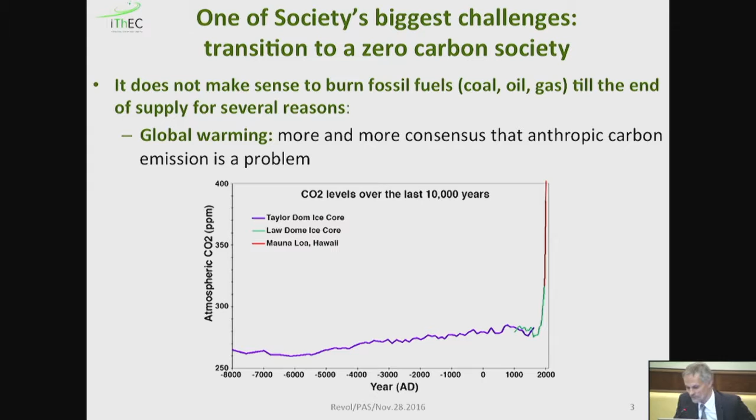I had prepared a few slides of motivation for the work I'm going to present here, but Professor Xu already discussed all this very nicely and very clearly. So let me just state that we have every reason not to burn fossil fuels until the end of supply. One reason is global warming. The other one, which is an immediate, real, and very costly major problem, is air pollution.

In fact, the European Environment Agency stated that air pollution poses the single largest environmental health risk in Europe today. And we're all familiar with those pictures of China with pollution. However, when the wind blows from Germany in Europe, Paris starts looking like Beijing at some times. So this is an issue that is everywhere in the world. It's very costly in money. Europe spends more than 40 billion euros in healthcare expenses related to air pollution.

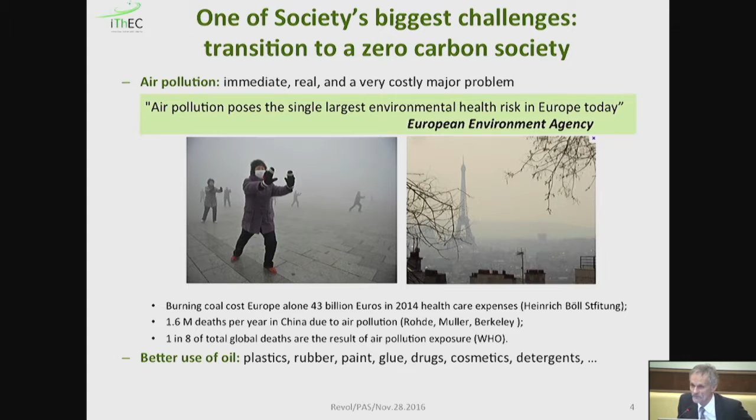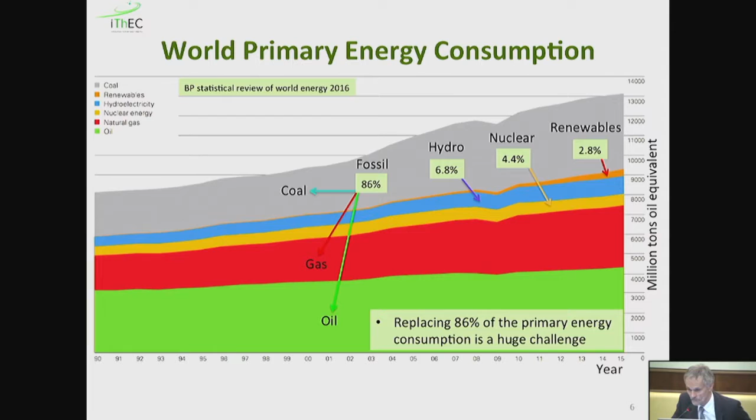Well, if you look at the energy mix in the world primary energy consumption and realize that fossil fuel in 2015 still represented 86% of the whole mix, you can really imagine how huge a challenge it is to replace fossil fuels. It seems that I forgot one slide, sorry. So, however, those fossil fuels are cheap, abundant, so the current tendency is still to increase the consumption. This is data extracted from the latest BP statistical review.

And, okay, let me skip this. So,

the solution must come from R&D, and R&D must be systematic. In particular, it must not exclude the nuclear fission domain. Nuclear fission energy has a lot of qualities. It's abundant, it's energy intensive. I remind you that if you want to sustain 1 gigawatt of electric power for 1 year, you can do that with 1 ton of thorium, for example, but you need 3 million tons of coal.

And nuclear energy can ensure baseload electricity production. It emits no greenhouse gases or air pollution. It could be made sustainable. Remember my definition of sustainability. So if it were not for accidents, waste management, and proliferation issues, clearly nuclear energy would be ideal. So the question we should ask is, can nuclear energy be made acceptable to society?

The present nuclear energy technology, I remind you, was not chosen to be acceptable. The uranium fuel cycle was chosen in order to produce plutonium for nuclear bombs, and the pressurized water reactors were invented to fit on a boat. So the question is, is there a better way of exploiting nuclear energy? And a number of physicists think that one answer to this is thorium fuel in fast neutron accelerator-driven systems, so-called ADS.

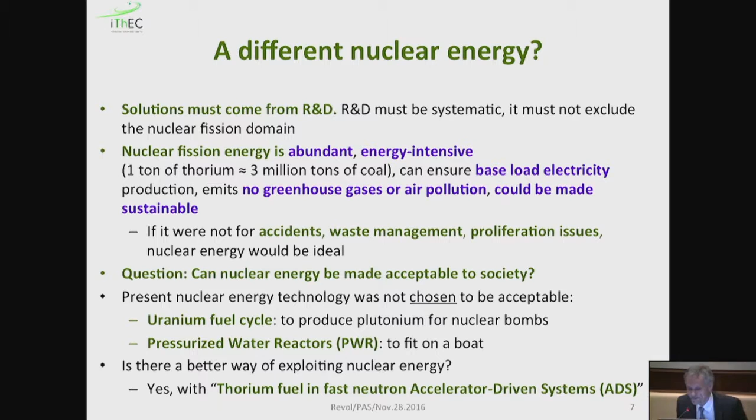Let me make a short comment on nuclear waste. Regardless of national policies, whether countries like Germany want to stop their nuclear programs, or countries like France want to continue their nuclear program, or developing countries want to start a nuclear program, the issue of nuclear waste has to be solved. The added requirement of retrievability of the nuclear waste makes the geological repository strategy at least more complex, if not questionable.

On this graph here, you have the predicted evolution of one component of the nuclear waste, the transuranic component, which is the long-term component, all the way to the year 2050, showing that if you only assume the existing nuclear power plants and those which will be commissioned by 2035, then the inventory of this type of waste will have to double.

Now, if you were to produce the whole energy of the world with nuclear systems like the one we have now, then you would have to increase all these by a factor 20. Now, to give you an idea of scale, 6,000 tons of TRU represent a lot of power. You can drive 6 power stations of 1 gigawatt electric for 1,000 years. So it represents a very large potential.

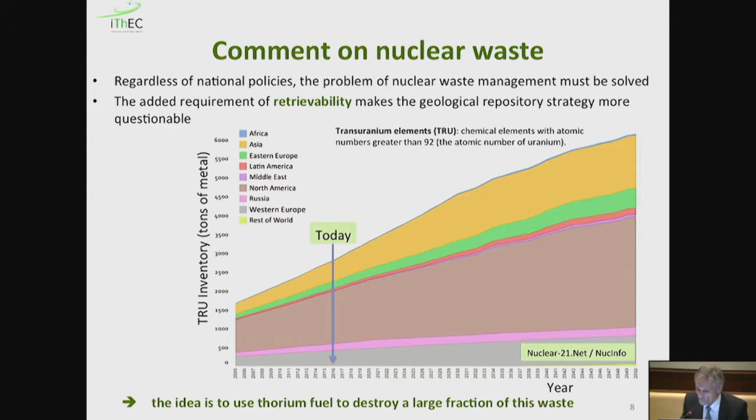And the idea is to use thorium fuel to destroy a large part of this waste. Well, thorium is an interesting element. It has excellent physical properties, better properties than uranium in terms of melting point, thermal conductivity, smaller expansion coefficients, which, if you want to manufacture fuel with it, implies a higher margin for design and operation as nuclear fuel. It's abundant, 3 to 4 times more abundant than uranium, and it's broadly distributed in the world, which has obvious geopolitical advantages. The known and estimated resources are about 6 million tons.

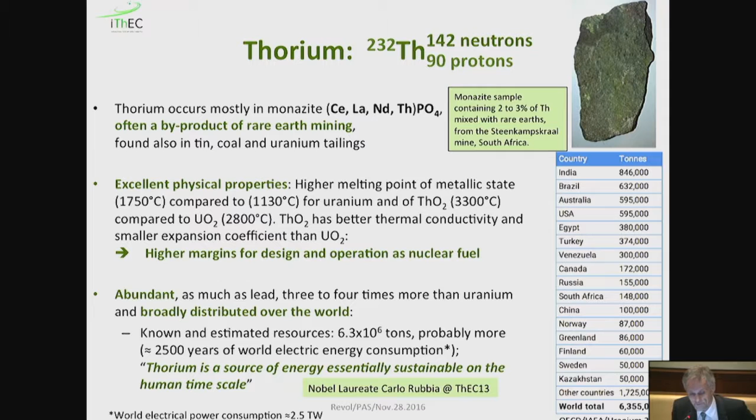Just to give you an idea, we could power the 2.5 terawatt of electric power used by our civilization today for 2,500 years. So this is what led Carlo Rubbia at the ThEC13 conference at CERN to state that thorium is in fact a source of energy essentially sustainable on the human time scale.

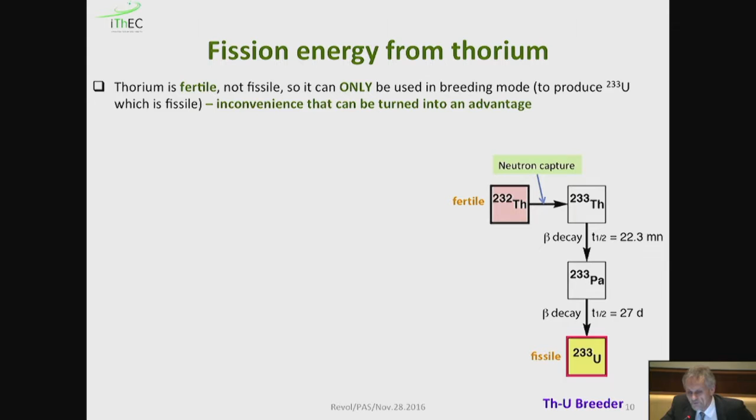Now, how do you use thorium? Unfortunately, thorium does not fission, so you have to transform it into uranium-233. This is what we call a breeding process. You put thorium in a neutron flux, and then you can produce uranium-233, which produces energy. It's a slight inconvenience, but as you will see later, it can be turned into an advantage. This breeding process is very similar to what is being prepared in generation 4 of power stations, breeding plutonium-239 out of

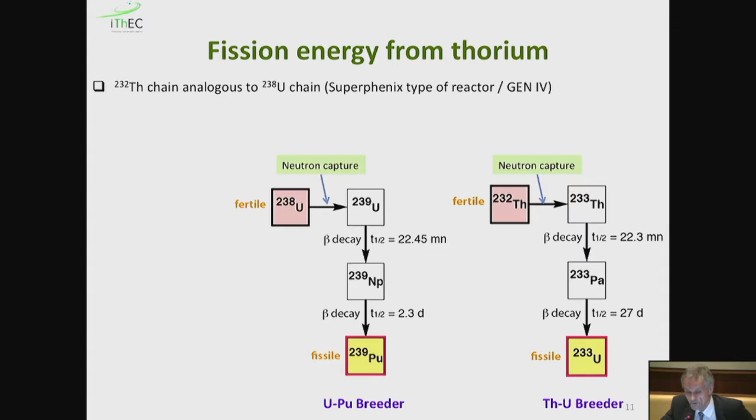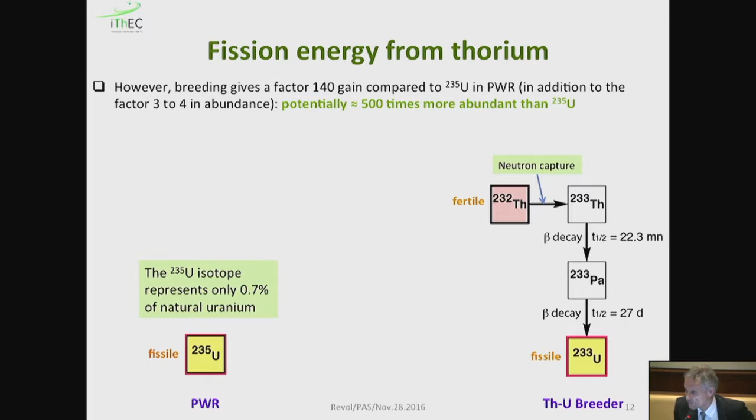uranium-238. Now, you can imagine that you can use essentially all the thorium and turn it into uranium-233, which can be compared to what is happening now with the PWR power stations, where only the 0.7% of the natural uranium is used as fuel, that is uranium-235. So you have a potential gain of a factor 140 between thorium used this way and U-235. If you convolute this with the larger abundance of thorium, a factor 3 to 4 more than uranium, you have essentially a potential factor 500 more abundance in thorium compared to U-235.

Here is a complicated plot. You only need to know that what is plotted is the number of neutrons produced per neutron absorbed in the system as a function of neutron energy. And since 2 neutrons are needed to sustain the fission process, one for capture on thorium and one for fission on uranium-233, in order to breed uranium-233, you need this number eta to be larger than 2.

And all you have to remember from this plot is that the most favorable area for doing this is the so-called fast neutron part of the spectrum, the high neutron part of the spectrum, where you can see that uranium-233 is almost as good as plutonium, and actually uranium-235 is rather bad. So breeding U-233 is most efficient with fast neutrons.

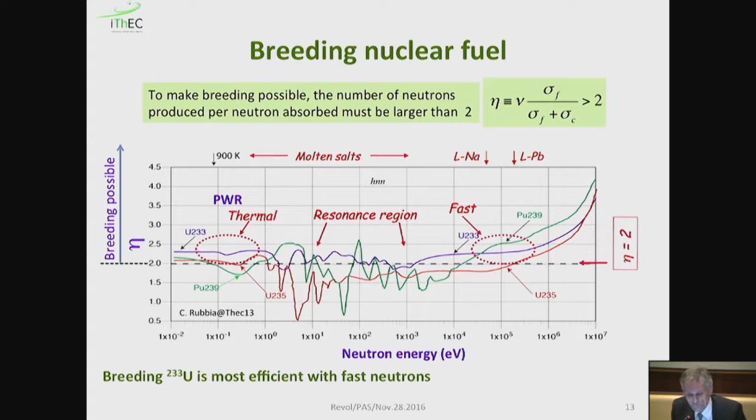If you put thorium in a fast neutron flux, this is what you get, a long chain of elements that are produced going to the right through neutron capture, and you can immediately have an intuitive understanding of why the waste production is much smaller with thorium. To go from thorium-232 to uranium-238, you need 6 consecutive neutron captures, and that means the probability to get there is very small, and that means that the production of these transuranic elements is much smaller than in uranium fuel, where you are dominated by the presence of uranium-238. Now, for similar reasons, the production of plutonium is essentially negligible, and that makes the thorium fuel cycle proliferation resistant.

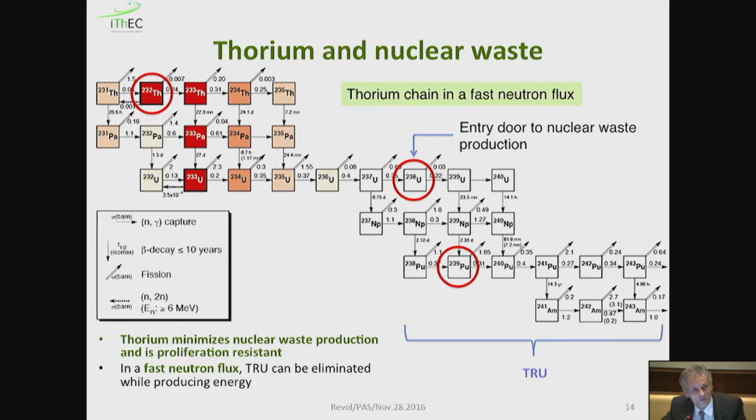How do you use thorium in practice? Unfortunately, you cannot just exchange uranium fuel by thorium fuel. First of all, because you need breeding, and second of all, because of neutron inventory issues. So there are 3 basic options. One is to use a thorium blanket around a fast critical reactor to breed uranium-233, extract this uranium-233 and use it as fuel in new critical reactors. This is the strategy that has been adopted by India. It certainly works from the technical point of view, but it requires maintaining 3 different reactor technologies at the same time.

It's not sustainable because you need uranium to start the process, and it doesn't address the issue of waste. Another possibility is to continuously move the fuel in such a way that you always have fresh fuel in the system, and this is achieved in pebble bed reactors and in molten salt reactors, both of which have severe safety issues to resolve, and in addition do not allow, at least for the moment, to work in a fast neutron spectrum. There is also traveling wave reactors, but they still have a long way to go.

In that case, it's not the fuel that moves, it's the breeding and fission wave of neutrons that moves across the fuel. And the third possibility is to provide an external neutron source to palliate the deficiency in neutrons to maintain the chain reaction, and this is what is called accelerator-driven systems.

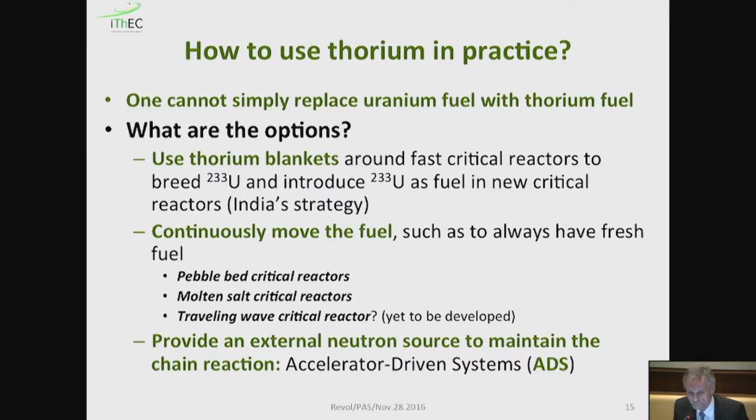Now, the idea of using an accelerator to produce neutrons is not new. It was proposed at the same time by Lawrence in the USA and Semyonov in the USSR in 1940, and in fact attempts were made to do what we're trying to do today, but the accelerator technology was not ready for that, so those efforts were abandoned.

You have here on the right-hand side the principle of an accelerator-driven system. The proton beam is inserted from the top. It interacts with, for example, lead, which has a nucleus which is neutron-rich. So the energy of the beam is sufficient to break the nuclei and produce neutrons, which then can travel all the way to the core surrounding the spallation region, where they can fission, produce neutrons, and breed U-233. This is the principle of ADS.

The major difference between this type of system and critical reactors is that the reaction is not self-sustained. You need the neutrons brought by the accelerator to continue the reaction. We call this subcritical system. So since it's subcritical, as soon as you stop the beam, you stop the reactions, and therefore criticality accidents cannot occur.

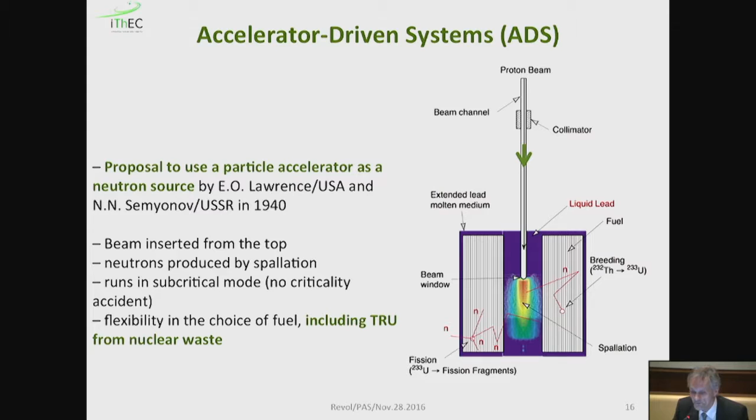The added advantage of having an accelerator is these neutrons brought by the accelerator give you a lot of flexibility in the choice of fuel. And for instance, you could mix some of the waste that I mentioned earlier with fresh thorium and use it as fuel. Since in a fast neutron flux, this waste that has accumulated in thermal neutron systems can fission. You can indeed produce energy while destroying the waste at the same time.

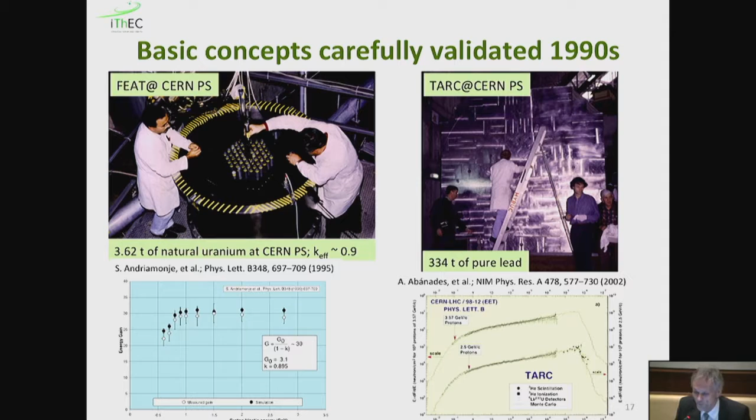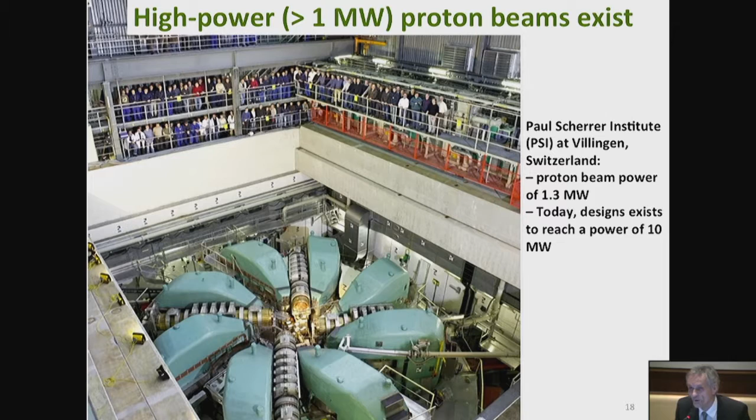We need to ensure a spallation process, and a lot of progress has been made also in this area. The first spallation system to reach 1 megawatt was MEGAPIE, also at the Paul Scherrer Institute. It was run as an experiment in 2006. Nowadays, we have the Spallation Neutron Source at Oak Ridge in the USA that is running routinely. It has reached 1.4 megawatt on target. And Europe is constructing at Lund in Sweden the European Spallation Source that will reach 5 megawatt on target. So essentially, today we have the technology that we need to start industrial systems.

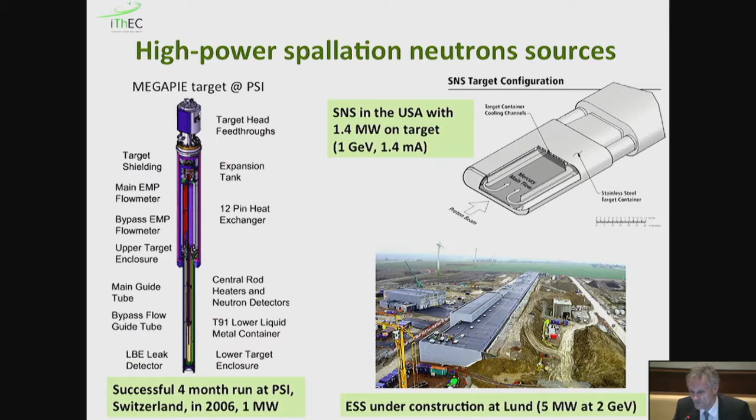There are three major programs in the world concerning ADS. The most advanced one is MYRRHA. This is happening at Mol in Belgium. It consists of a LINAC which feeds a 2.4 megawatt beam into a subcritical core which is cooled with a lead bismuth eutectic coolant. In principle, MYRRHA should be the flagship of ADS projects.

However, it's only partially funded, and this is really a shame in my view if you consider, for instance, that in Europe between 2005 and 2013 the EU spent 600 billion euro on renewable energies, most of it on subsidies. So had they spent only 599 billion euro and given MYRRHA 1 billion, I don't think that would have done any damage to renewable energies, but it would have tremendously advanced the field. So we don't know for sure when MYRRHA will be able to operate, because right now it is not yet funded.

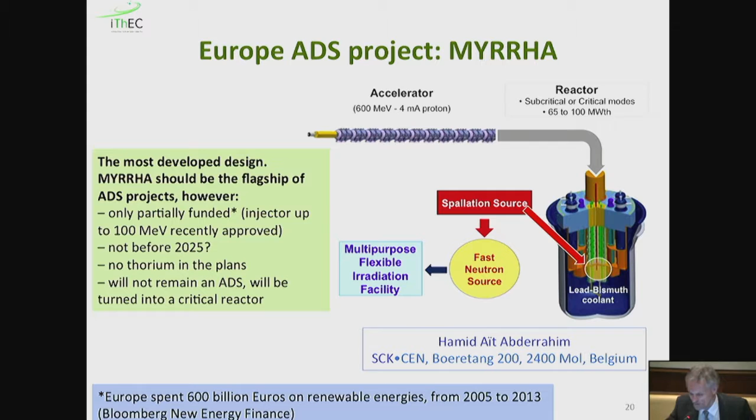There is no thorium in the plan, and after a couple of years of operation of MYRRHA, the accelerator will be removed to do something else, and MYRRHA will be transformed into a critical reactor.

The next very important program is in China. It's called ADANES. It's a complete energy system with the ambition to produce 1,000 megawatt of electric power by 2032. The first stage consisted of building two injectors with two different technologies, and in China everything is done in a very efficient way, so two different laboratories are actually competing to do this, and in the end the best solution will be chosen. Last December, the central government approved the second phase of this program until 2022.

And what is really very interesting when you discuss with the people involved, in particular with Wenlong Zhan from the Chinese Academy of Sciences, is that the approach is to be innovative, and they are studying ideas on the fuel cycles and new ideas on the spallation targets. They have a system with little grains that circulate with a magnetic pump, etc. And even though it will take a long time, I'm sure that China will succeed.

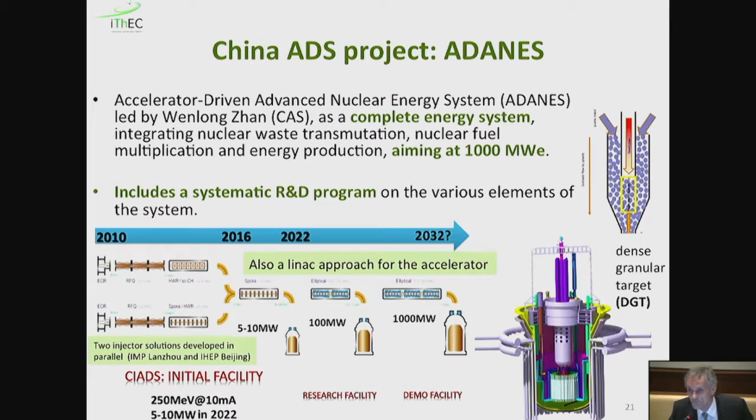There is a program also in India, which is actually coming from an initiative at Fermilab. That was a project called Project X, which was to build a 1 GeV LINAC with a power of 10 megawatt. And now this project has been carried out to India, and this is the third major project on ADS.

iThEC, the association which I represent, is a non-profit association situated in Geneva, and its goal is to promote R&D of thorium. And iThEC realized that since there is a very long time scale for these two programs I mentioned, MYRRHA and China, we could perhaps do something useful in the meantime. And we discovered that in the Moscow area, an infrastructure exists that would allow to couple for the first time a beam to a subcritical fast neutron system at significant power. Significant power means a few megawatt.

And indeed, at Troitsk, you have a LINAC, which can go to 600 MeV, in operation with a neutron spallation source, which is used to produce radioisotopes for medicine. And there is a beamline which is available, and even a pit and all the infrastructure for that. And if the funding is found for this, in 5 years and for less than 4% of the cost of MYRRHA, we could characterize all the properties of ADS. And when you go to a fast critical core, scaling laws can apply to then design an optimum industrial system. So we are at this time looking for the funding to prime the pump, if you wish.

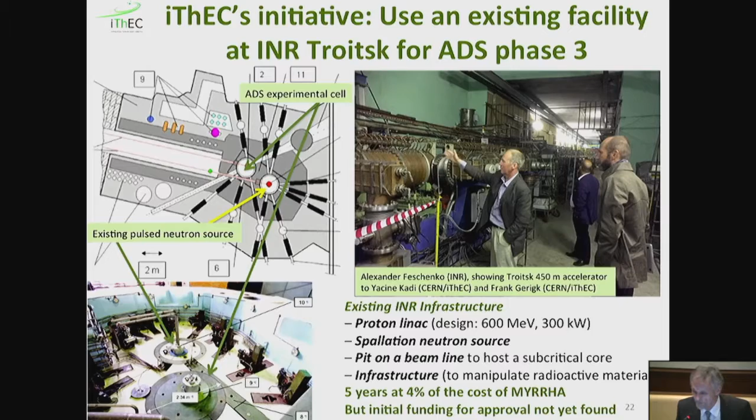The second initiative of iThEC is the development of an accelerator which is optimized for our application. We want to design an innovative cyclotron. It will be a one-stage, that means very compact cyclotron, 600 MeV, 6 milliamps, so a reasonable power, 3.6 megawatt. This is the baseline. We do not exclude going to a higher power, but the design concerns are to get the highest possible reliability through redundancy. In this special case, we have enough room to have 3 injectors, high efficiency and lower cost. We have reasons to think that the cyclotron solution will be cheaper than a LINAC.

So a proposal will be submitted in the EU in the Horizon 2020 program in January, and this is a collaboration between CERN, Paul Scherrer Institute and AIMA. Paul Scherrer Institute and AIMA are 2 of the world experts on cyclotron, and there is also Ansaldo in Italy and a couple of other industrial companies. A last comment I would like to make is this development of a high-power accelerator can open the field for other applications, in particular the production of new alpha emitters for medicine, which require relatively higher energy and also higher beam intensity.

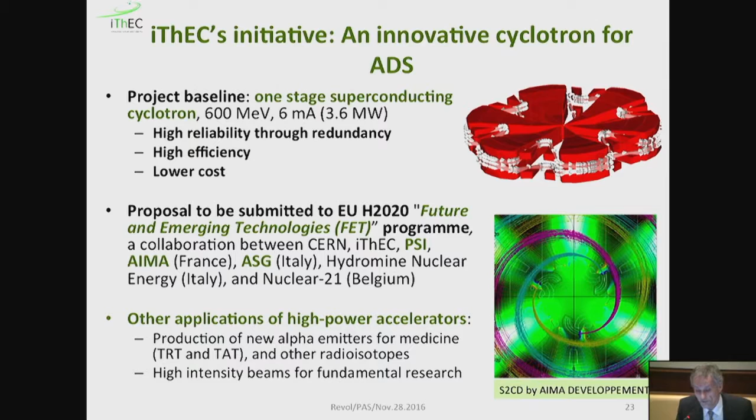So let me conclude by saying that arriving at a zero-carbon society in a sustainable way requires innovation, hence a systematic R&D effort, including nuclear fission energy. The fast neutron accelerator-driven systems using thorium fuel offer the possibility to transmute a major part of the long-lived nuclear waste and produce energy. Therefore, that explains the title of my talk. Thorium is a potentially sustainable source of energy for the future, and the development of accelerators for these types of systems can bring further benefits to society, in particular in the medical area.